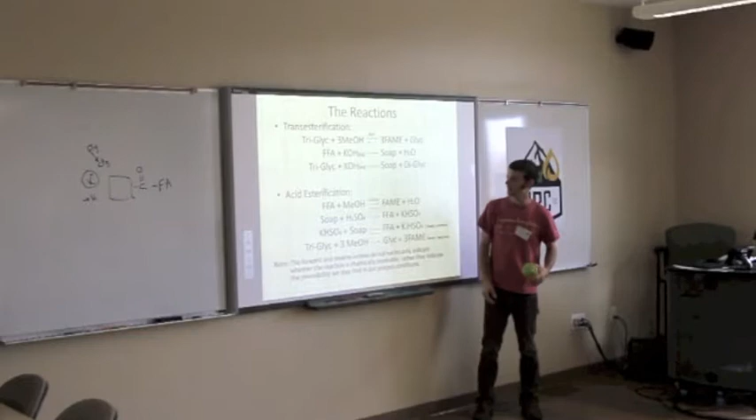So to what extent this reaction happens is questionable, and it may be that all of your soap is just knocking off one hydrogen from your acid, and it's no longer going to be a catalyst, but it's also not going to contribute to getting rid of your soap. So it may be a 1-to-1 ratio that this equation doesn't happen, and you're losing more acid per soap, and you're basically gaining this unuseful chemical that will be in the mix.

Here's John. Why is it only one potassium? Why doesn't it go to K2SO4? It would be based on equilibrium. So it might or it might not, but it's going to be less likely to do this than it is to do this. This is definitely going to happen. But is that a typo? You have K2HSO4. I'm sorry, it is a typo. There shouldn't be an H there.

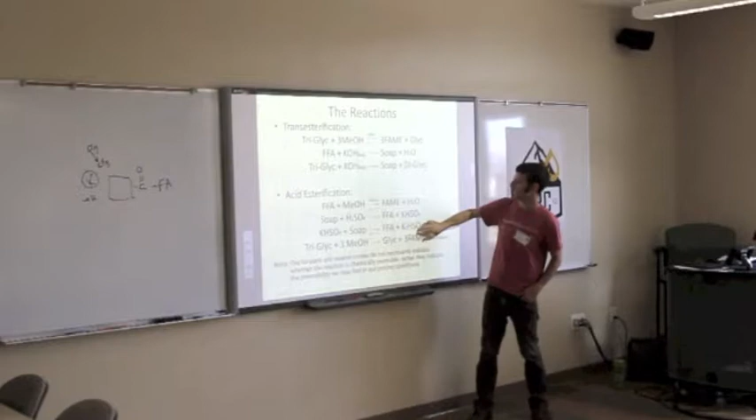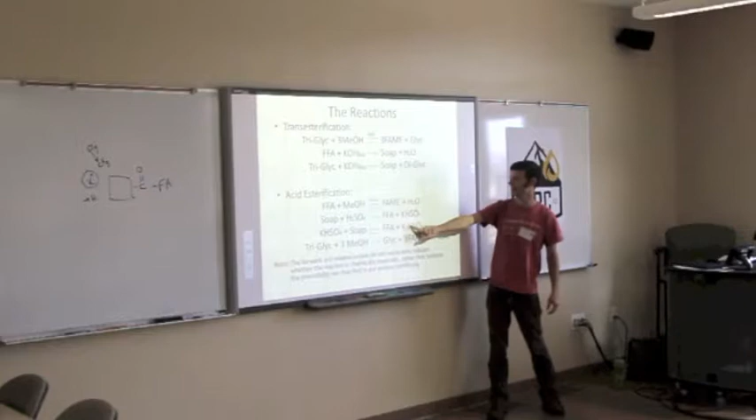That was your question? Yeah, I was just wondering why it doesn't all of it go to that. Why it doesn't all go to this, minus the H. Okay, so it is. It might. It's possible that it does, but you really get into something more complicated there, where you have to look at the equilibrium of what's going on, because it's less reactive.

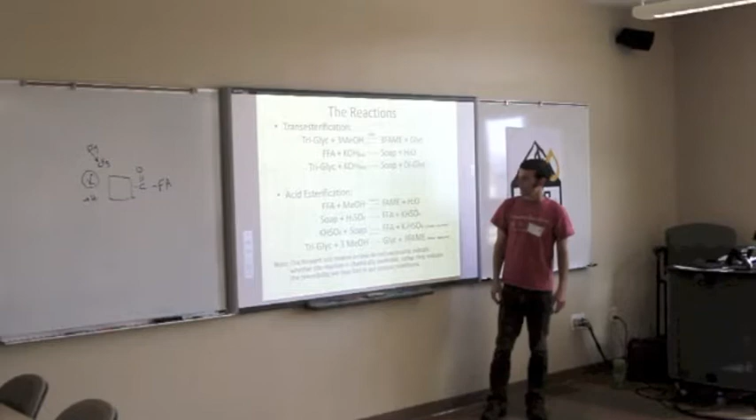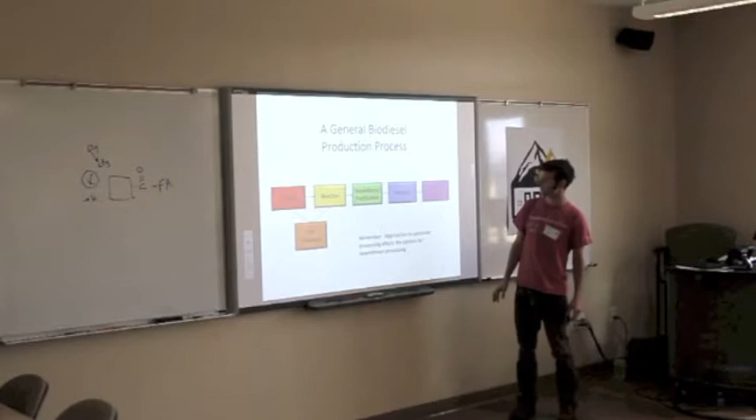Okay, so in general, putting those reactions to work, this has been my experience with what happens in the biodiesel process. And I'd love to hear alternative perspectives on this, because having this conversation, I think, is important. And I think it's important to remember that we can't start talking about what's going on down here without understanding what's going on up here, and that's going to change from process to process. So it's an incomplete conversation just to talk about washing unless you assume some basis up here, because it's going to turn out very different down here.

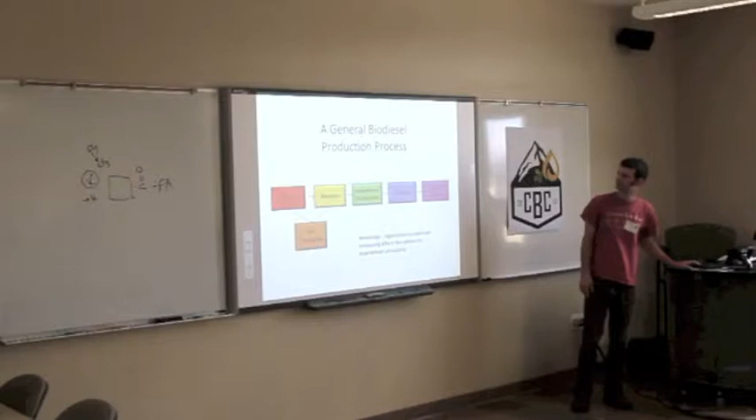So in oil preparation, a typical assumption that I've made in the past that I found to hold fairly true with lots of different gallons of WVO is that it's coming out of the restaurant between 15 and 20% water and food chunks, called schmutz, and 2 to 10% FFA. Does that seem like a reasonable assumption? Do people have different experiences? 30%. 30% food and water? Yeah. So some more, anybody less? We average 11%. I was just gonna say 10 to 20%. 10 to 20, and Jeff?

We were up at 15-20%, and just through education of our vendors and frequency of pickup, we've knocked that down to single digits. Great, well, that's a nice tip, to really put energy into the customer relationship. It does work. You don't think it is when you're out there collecting sometimes, but it does work. My area is about 40-45% regularly. Food and water, 40 to 45%. Okay. So you have more in your stream.

Can I ask a general question there? What do people do with their slips? Great question. If it's 10, 15, 20%, that's just straight loss out of your source. What do people do with that? First of all, you don't pay your client for that, you deduct the water from what you pay your client. So it's not lost in that sense. You decant it off, you let it settle out, the bottom layer will be clear water you get rid of. So water you just down the drain. If you've got very clear separation, water on the bottom, then you got a layer you got to truck to a compost facility or something.

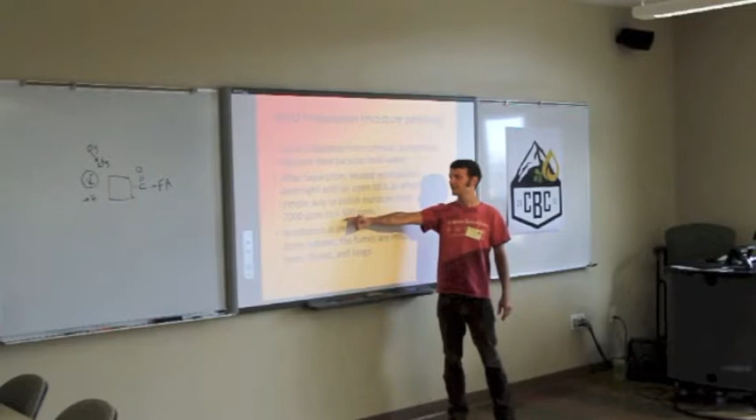But you can do it passively, just open the manway, recirculate that oil, and it's just free falling. You can put a splash plate, but it works fine, just free falling. And you can get your moisture down to a tenth of what it might settle to. If it settles to, say, 5,000 ppm or 0.5%, you can get it down to a tenth of that by recirculating. And how well you set up that system will determine how long it'll take to do that.

Yes, sir. Do you have to worry about raising the FFA since you're heating it more? I've never worried about that, and I haven't done very specific tests on it, but I've never seen it be a problem. Has anybody definitely documented or seen using tests that they are increasing the FFA in their oil by heating it for an extra day?

Yes. You have? So to mitigate that, we put an antioxidant in collection containers at the restaurant. We go pump a restaurant and then we leave an empty container with an antioxidant. Like Santoquin or something? And we use twice the labeled dosage on Santoquin at the restaurant, and then we come in and put another twice the labeled dosage in our heat settling tank. And that counteracts the effect. Okay. Great. What kind of increase were you seeing if you heated it and recirculated it?

Well, this was early on. We were probably getting some sitting on the yard and some in the heat process tank as well, but it would probably come in at 10% and when we would end up processing it, it would be in the high teens. Okay. So a measurable effect. Yeah. And so now we're stabilizing at about 9 or 10% is what we're processing, 8 to 10%.

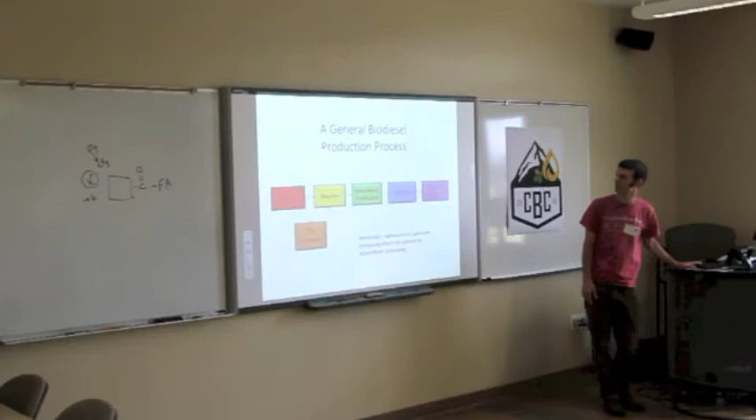I do want to mention that I'm definitely not going to get through all these slides, and there's a lot of information on these slides that I wanted to include for reference. So it'll be available either through CBC or you can get in touch with me. So I'm interested in what parts of this process people are most interested in talking about. We have 20 minutes, and there's still a good deal of information we haven't touched on. So what are people most interested in? We can maybe just skip around, because I think this is a good conversation, hearing from different perspectives and real experiences. Anybody want to point to a particular spot?

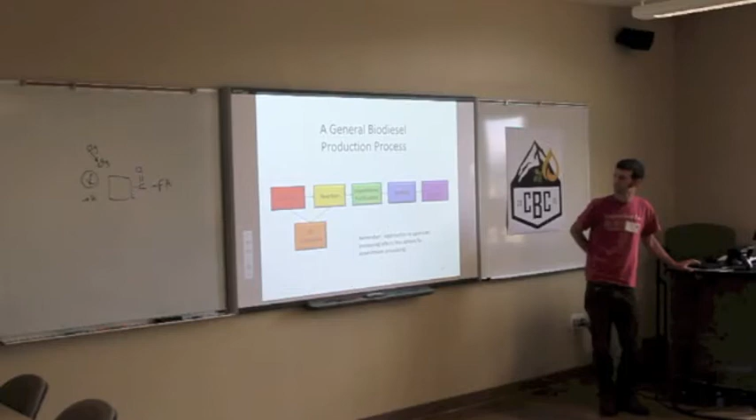Green. Green, separations and purifications, love it. So in your biodiesel, the reaction is complete, and you're in spec for your conversion, and you are now dealing with the biodiesel, which is the stuff that you want, and below it is the glycerin, and in the glycerin is probably most of all of these things. And in the biodiesel, there's also soap. There's probably less methoxide, but probably some methanol dissolved in the biodiesel. And maybe a little bit of moisture, which will be more of a problem if you water wash later, but at this point it's a small amount.

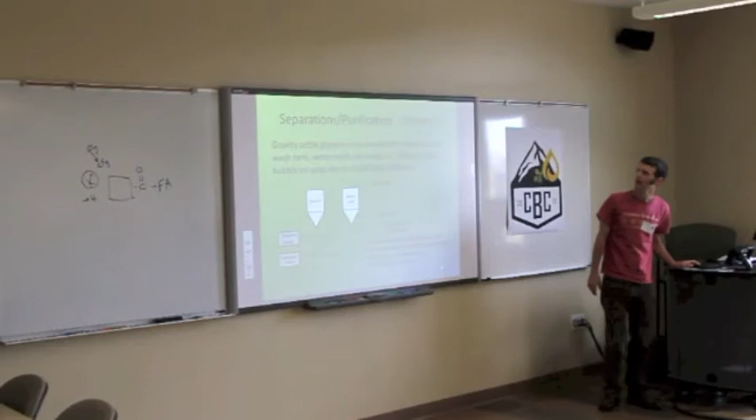And then residual monos and diglycerides, which are probably in the glycerin layer. So that's the solution we're dealing with. You stop the pump, it settles out. Some amount of this stuff settles to the bottom, and some amount of it stays up in the biodiesel. And you can start out with the basic, what I would call the first generation.

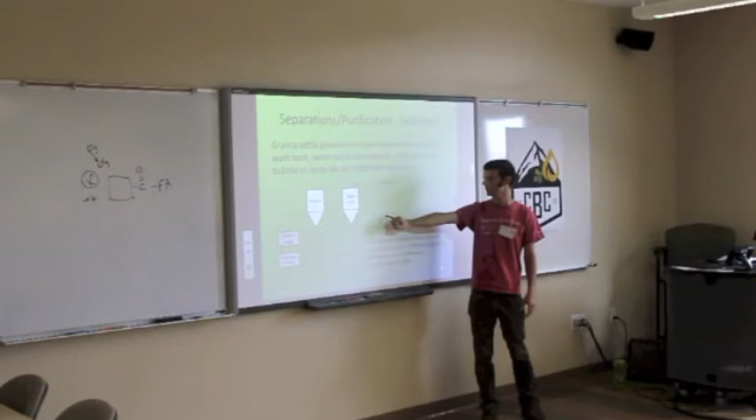What I started on in 2007 was, after the reactor, you drain out the glycerin using gravity, you send the biodiesel over, mist wash it, and after you've washed it down to a comfortable soap number, maybe less than 30 ppm soap, you dry it with air, and then send it to fuel holding, where you'd also add your additive, your Ethanox or some kind of stabilizer. So that's where I started, and I think that's where a lot of us started. Anybody work with a process like that? Just straight up water washing after the reaction.

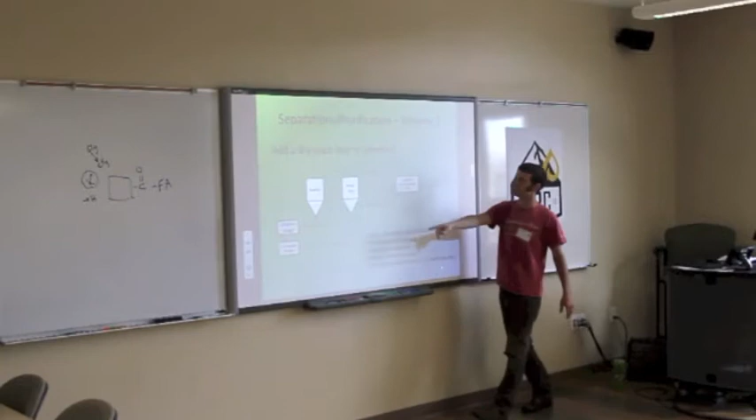So moving to the next level, you do a little bit of water washing and then some drying. You don't have to do as much water washing, and you run through a dry wash. You go through an ion exchange resin or an Eco2Pure or a wood chip type tank, or a filter press. Caleb, what level do you try to get your soap ppm down to if you're going to do a dry wash afterwards? I go for 500 ppm. Other opinions? I used to do 800. 800. What soap level do you go down to before you send it through your resin?

Depends where it's going. We've done a cellulose tower followed by an ion exchange tower. The cellulose tower is good like the sledgehammer, and the ion tower is good like a real fine little tool. Pick your analogy there. But you can take large chunks of soap out with the cellulose. So you can go from 1,000 down to 200, and you can go from 200 down to 50 with the ions.

Great, great. You know, Rod last year gave some recommendations. If you're above 2,500 ppm, you don't want to put it into the ion exchange at all. You want to go into some sort of a cellulose media and knock it down. And my goal is under 1,000 before I go into resin. And you're happy with your resin life with that? It doesn't feel like it goes out too fast?

Well, I sell resin, so that's a... I think the lower. I'm curious to know what others do. Yeah, so we got an 800, 500, others. Soap ppm going into resin. So it sounds like we're at 500 to 1,000 ranges.

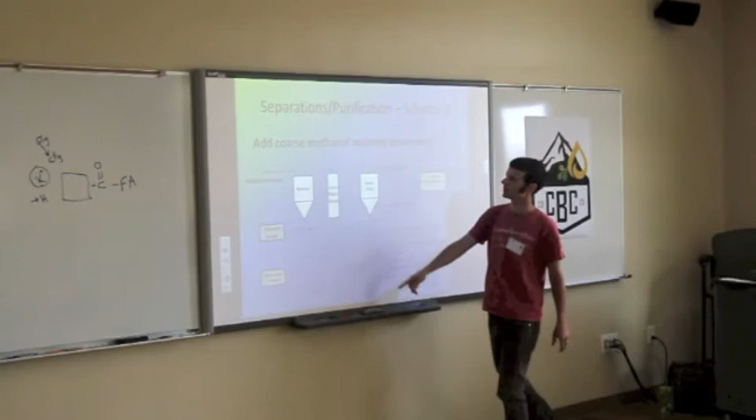You include a methanol recovery unit, so now you're not washing out as much of the methanol, which makes your wastewater stream less of a concern. You're also getting a lot of this methanol back, which is a nice recycle stream, and you're buying a chiller, and you really need to look at how much heat you had in the first place in terms of a boiler, or do you have enough for methanol recovery? It's a pretty energy intensive operation.

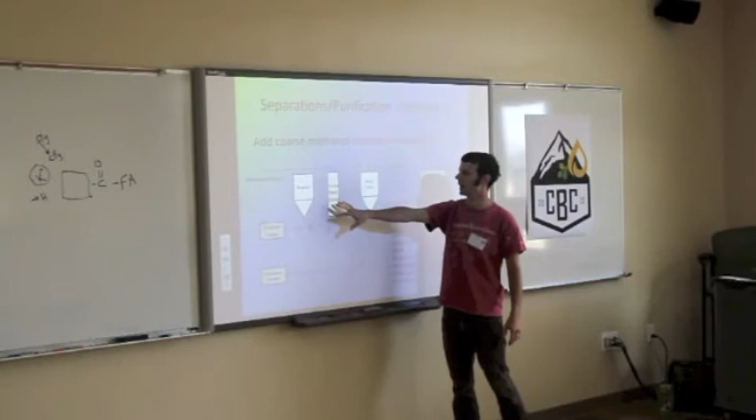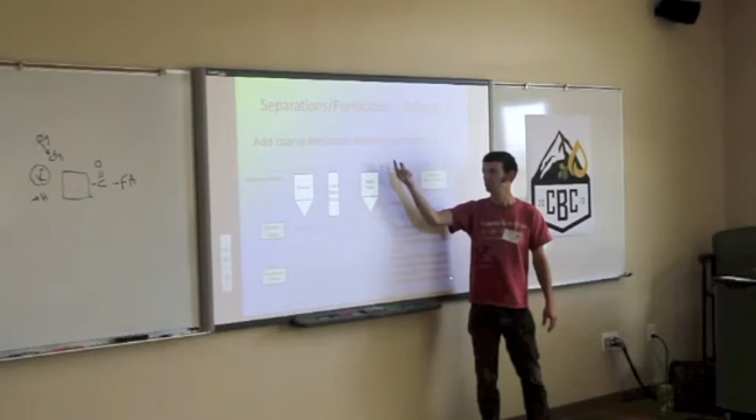And this model here would be coarse flash. It's a lot easier to come up with a coarse flash drum that will get you most of the value in this stream, but you're still not going to be in spec for flash point. So you need to follow that up with some kind of a water wash, or you might just bubble it to get the methanol out. You can bubble it down into spec for flash point. Again, you're getting into that issue of how much air you want to be bubbling through the liquid.

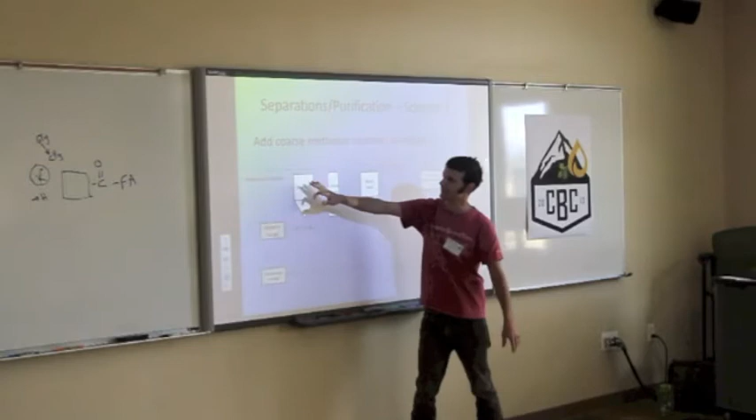But you do get this value stream out, and you don't necessarily simplify your wash process much, but you do have a few different options here rather than just having to hit it with water.

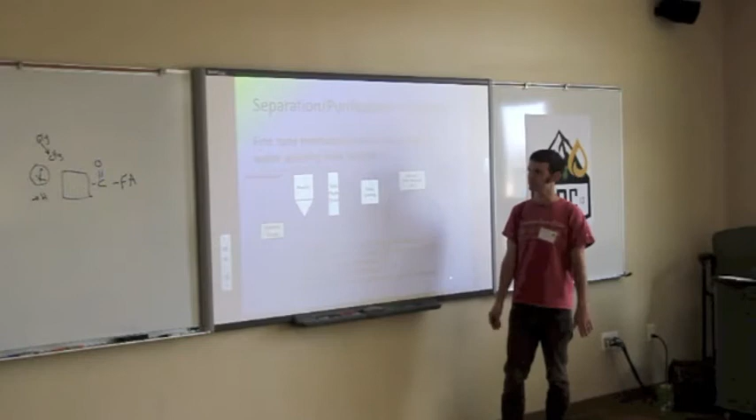And then this is moving into a water-free system, another step up in complexity. Set up a flash drum that actually gets you down to 2,000 ppm or less of methanol in your biodiesel. And at that point, you can get rid of the soap not by washing it out, but just by settling it out. And it's not real fun to deal with the soap, but it's not fun to deal with water in your fuel either. So it's a different approach that might save you on a waste stream.

Caleb? Will that work with sodium or potassium, or just sodium? Works with, let's see, the soap settling, sodium or potassium. I've seen it in both, and it's not fun to deal with it either. It's not fun as in hard to get the soap out, or? Well, so here's what happened.

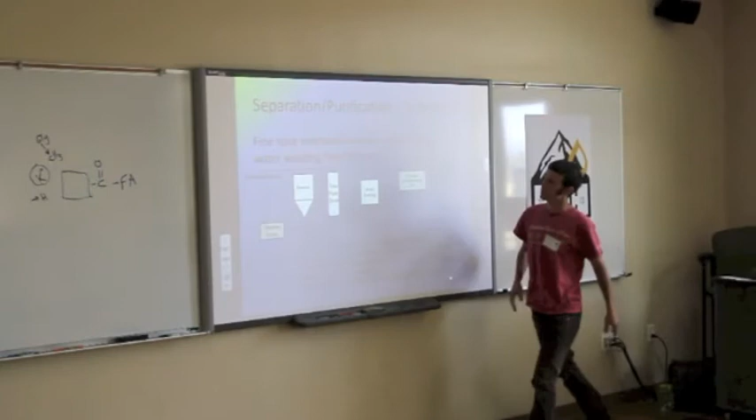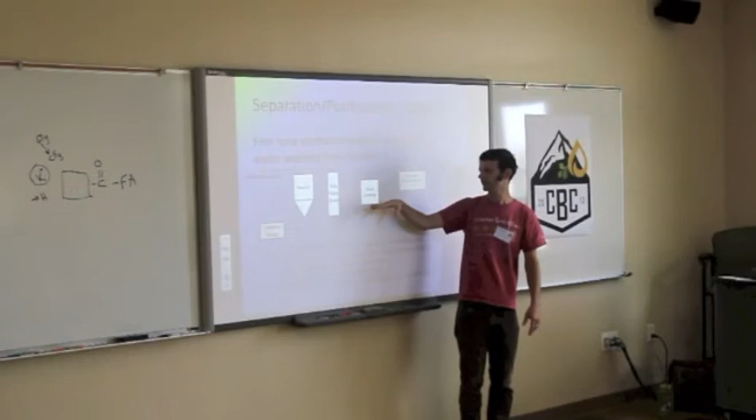You take it to the soap settling tank, and let's say that's a cone bottom tank. And so you get this great settle, and you've got this clear bio on top, and you've got this nicely settled majority of your soap down in the bottom of your settling tank, and then you go to drain it out, and nothing happens when you open the valve. Or it starts flowing, and these chunks go out, and you're like, yeah, I'm getting rid of this soap, this is great. But then the fuel clears up, but there's chunks just all over the inside of the tank, and you're draining out a lot of the fuel for an occasional chunk of soap coming out.

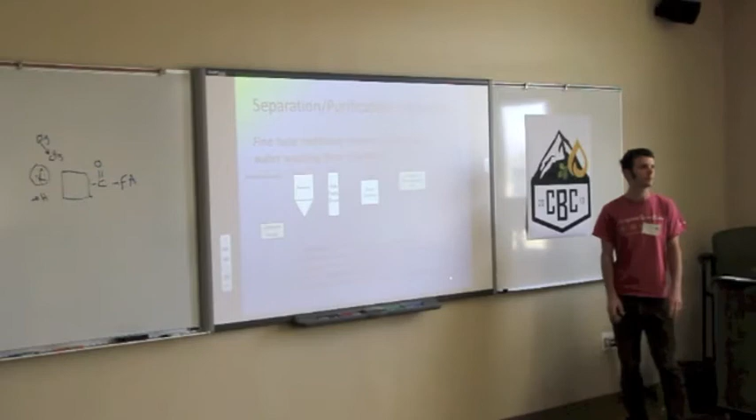If you try to pump it, it will clog up your pump. If you try to add water to it, it will become very thick, and I've even seen vac trucks not be able to suck it because it has turned into this very thick, stable emulsion, or even a solid at that point. And that's with potassium, it's solidified, so it'd be worse with sodium. So yeah, it's not fun.

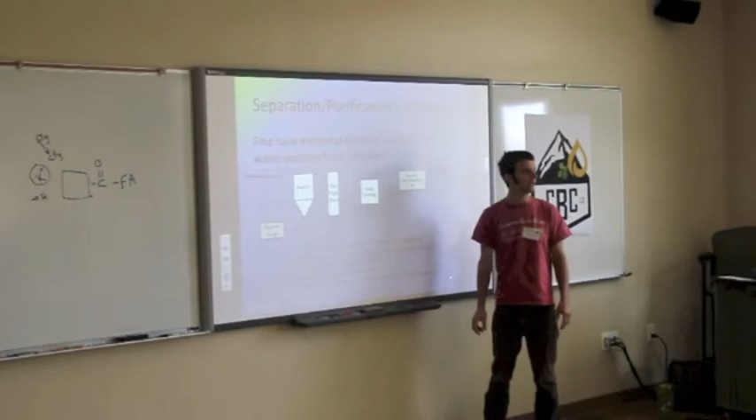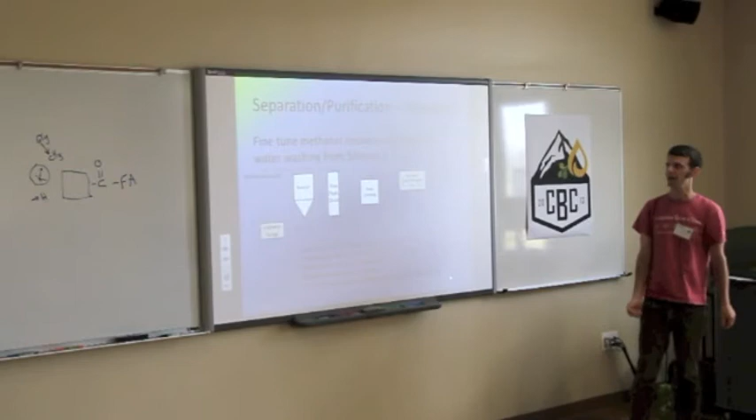So what Kelly Green and I have been working on is instead of trying to drain the soap, which has been a royal headache for every plant I've seen try it, stick a pipe down in the top that you can adjust, and have a sight tube on the top of that pipe, and you can slide it down in that tank, pulling out clean fuel until you hit that soapy layer, and then you go back up, and in the case of Kelly Green, you tighten up your hose clamp, and it's locked in place, and then you're pulling out fuel that's maybe 700 to 500 ppm soap, and you've got this settled soap in the bottom.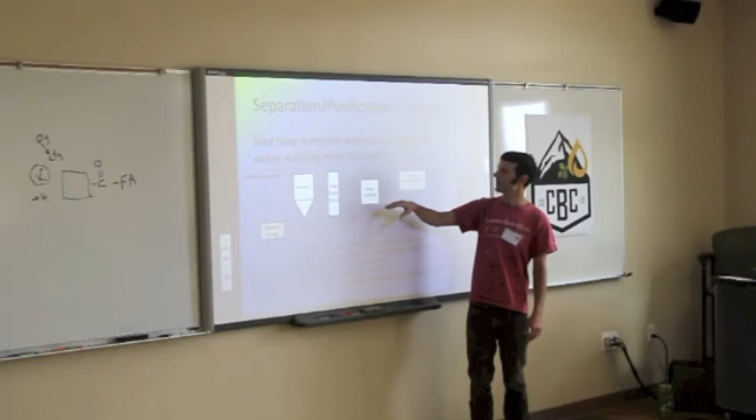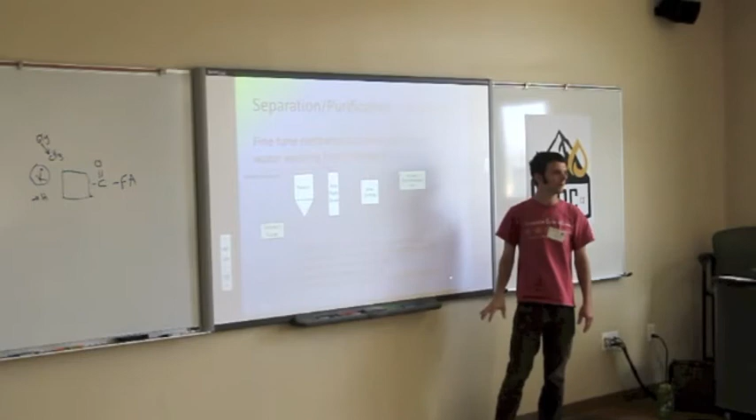Actually, the flash point does go down just a little bit when the soap settles. It goes up, meaning the methanol content in the fuel goes down. So you get about 5 to 10 degrees Celsius increase in flash point just by letting the soap settle out. So there's a little flexibility, but you still want to get the flash point to 110 or 120 degrees Celsius coming out of this flash drum.

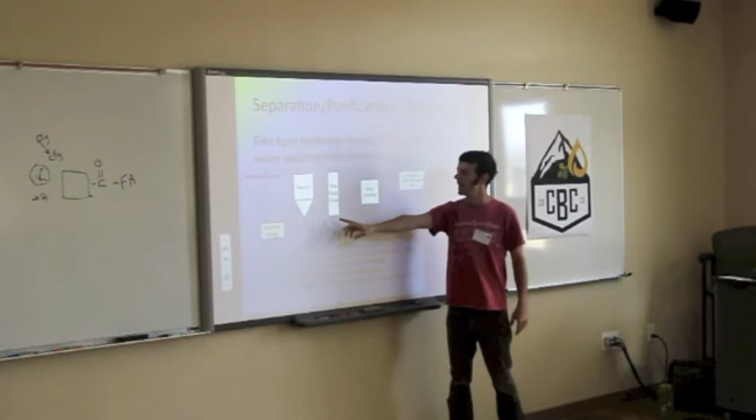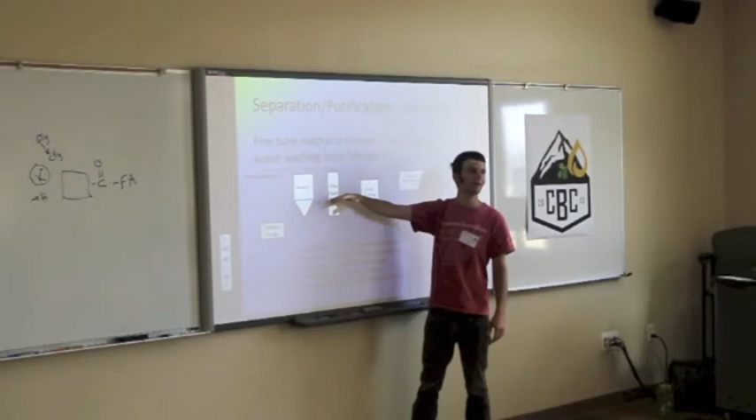And that's a little more challenging than just getting most of the value stream out, because you can get 95% of the value stream out, and you still have 50 degrees to go on your flash point, so you're really not getting a lot of value in terms of recycled methanol when you're getting your flash point into spec there, but you are significantly changing what happens downstream.

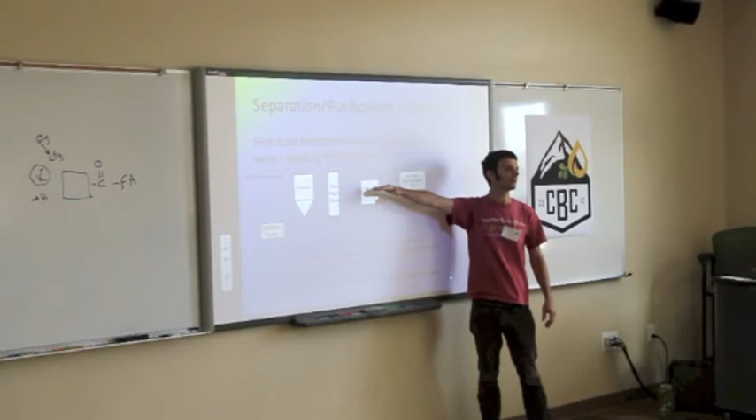So at the point of being at 700 or 500 ppm soap coming out of there, you can go right through the dry wash, or you can move into a centrifuge process, and you can get it down even lower. In theory, you could have more settling tanks and let it settle longer, and maybe get it down to the 200 range. And if you're down in the 200 range, that's below where you even need to be for your dry wash if you're doing a resin type system. So you're in a pretty good place for that.

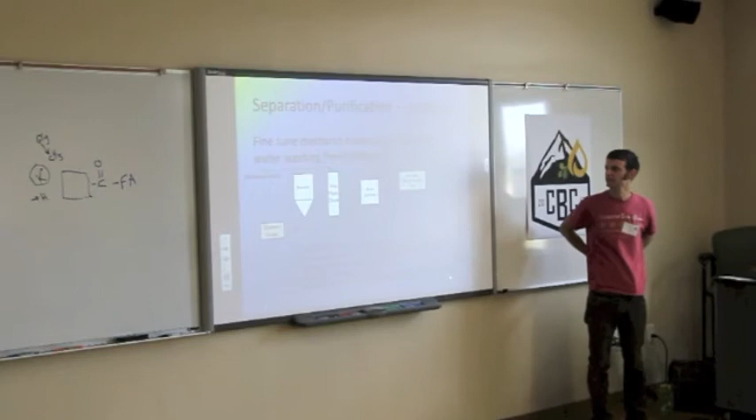And yeah, okay, so we want to cut it at this time or in 10 minutes? Oh, give a little buffer, if you've got a couple questions, any last things.

Okay, great. So that's kind of where I've gotten to with the edge that I've been working on, and hope that anybody else finds that interesting and wants to move their process in that direction. It's a good way to go.

Yes, sir. I was wondering where biodiesel distillation fits in. Biodiesel distillation fits in Scheme 5, which is not on here. I would say that's maybe the next step, and I think that you need to be in multi-million gallon per year plants before that makes sense. And I don't know that. Maybe there is a place for distillation in small scale. And if that's true and anybody knows about it, I'd love to hear about that.

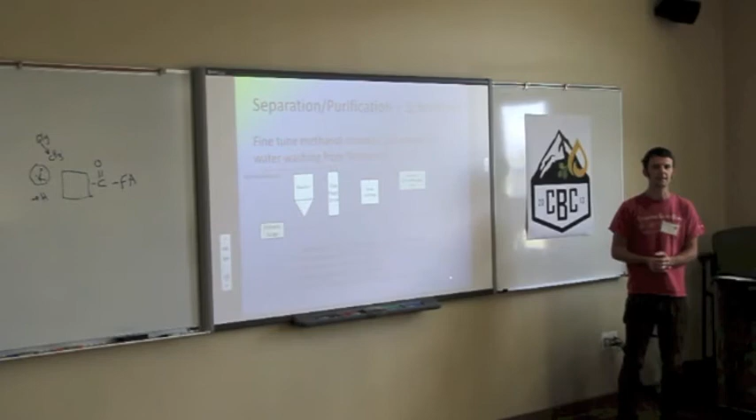But I think of distillation as something that is more complexity. If this is difficult to achieve, the fine-tuned into-spec flash process, the distillation is going to be another level of difficulty. So that's where it fits in.

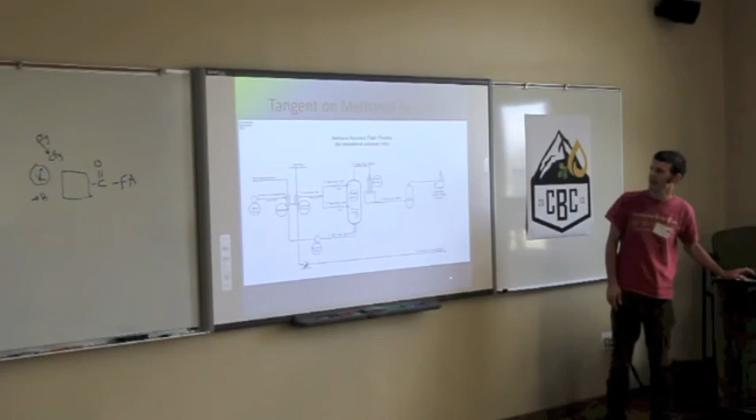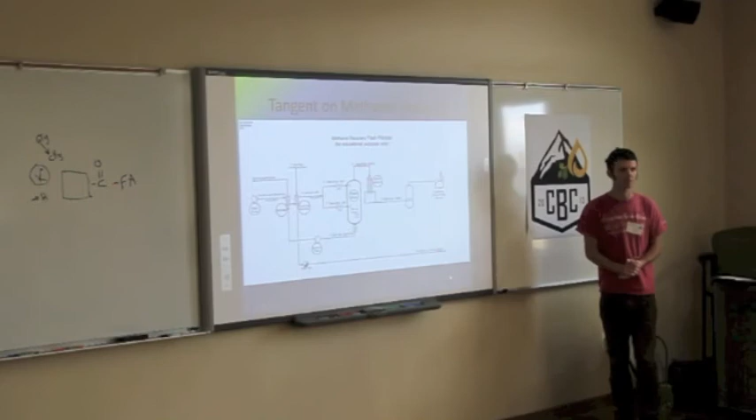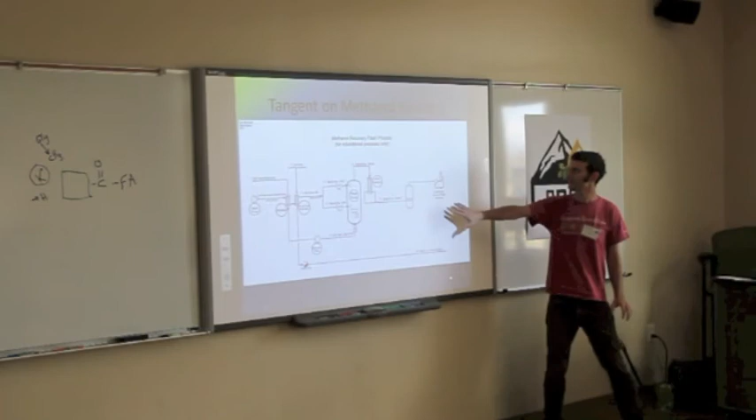And I included on the slide a general P&ID that I put together of a flash process. I didn't get flow rates in there, and you've got a little bit of temperatures and pressures, but if somebody wants to dig into it, this would be a nice little reference to get some ideas. But with this system, even the liquid ring pump is kind of complicated, and you've got a chiller, and you've got to have the heat available. So I think that's part of where we are in our growing edge, getting our methanol recovery, getting us in spec with flashpoint, if we want to get away from water washing.

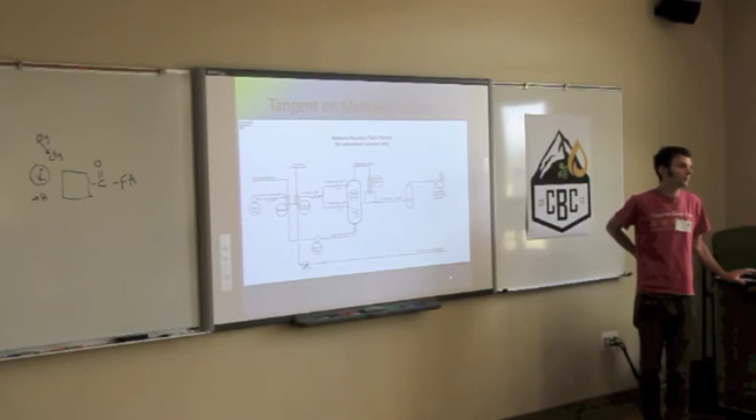I do want to skip to an opinion that I've come to after working in maybe 6 or 7 commercial facilities, and really just focusing on these process issues over the years: our safety, our commitment to quality, and deepening our understanding of the process are tools that we need to hone to continue our viability in a challenging market. And the collaboration that happens at this conference and outside this conference, I think, is a huge, valuable asset that we can leverage that helps us grow faster than more competitive approaches where everyone's holding their information close to their chest.